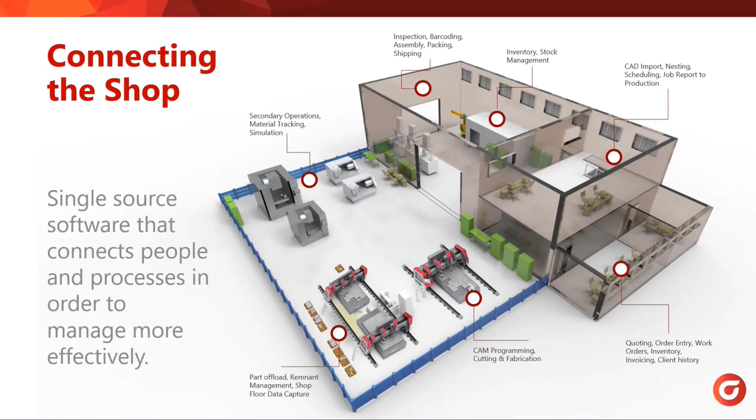Our targeted audience for today's webinar are customers that have SigmaNEST Tekno package. I'll be demonstrating 5 of the top reasons our customers choose to upgrade to the SigmaNEST PowerPack, which is the next package up. So what we want to be considering in the background is what's important to your operations. Remnant tracking, sheet analysis, business interface with host ERP, inventory control, and continuous nesting. Let's go ahead and start.

One area that I love about the inventory control is that you're able to import all your sheets that are available in your facility into SigmaNEST, and it can become part of the SigmaNEST ecosystem, where we can track the inventory as it's going through the life cycle of your process. So all our sheets and our inventory is found in the sheets list here, and then we're able to see all the different materials that we've loaded into the plant. I can look at prime sheets, coils, remnants, and future remnants.

What I like about it is how easy it is to load. So you can hit the new button here. You can receive some material into the plant. Maybe it's a 120 by 60. You receive 20 sheets. You can put what location you put it in, in your plant. Maybe the mill that you bought it from. Maybe you bought it from, let's say, Klockner. Lots of sheet data information, heat numbers, all that information can be tracked. The value of the material, if it's available for the general inventory, it's reserved for a certain project, or maybe it's on consignment. So just as easy as that, we're able to add 20 new sheets into the module.

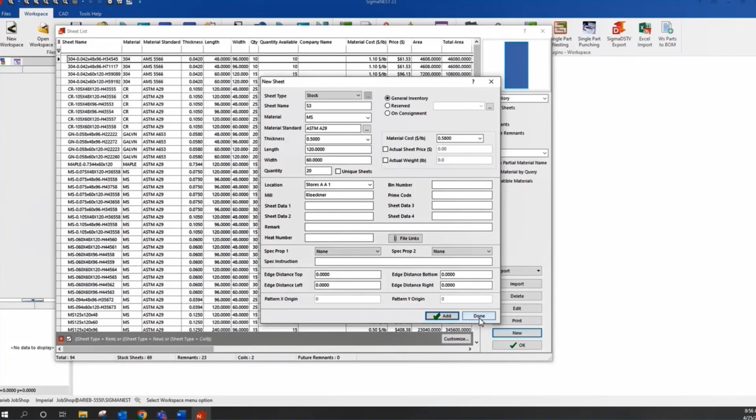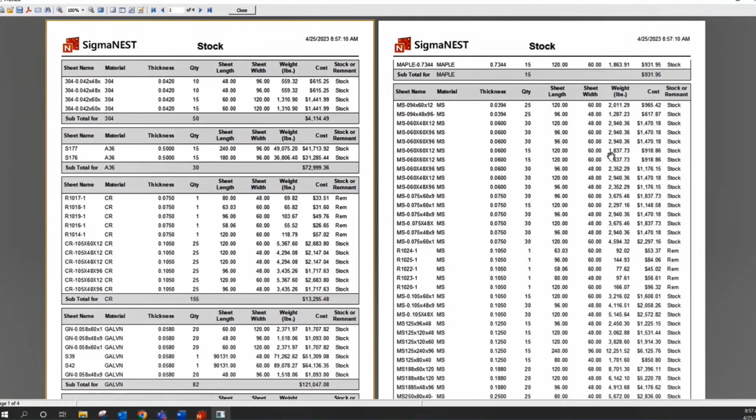Then we have also available for you some reports. So let's look at some of the reports here. I'm not going to look at all of them. We're going to look at the sheet summary and the grade by thickness and remnant. So let's preview that real quick. The first one here is our sheet summary. So this is all the different materials that exist out in the plant. If it's stock, if it's a remnant, all of that information is stored right here. Very easy, when you're setting up an inventory, you can start out with that and then confirm the locations and the quantities and all that.

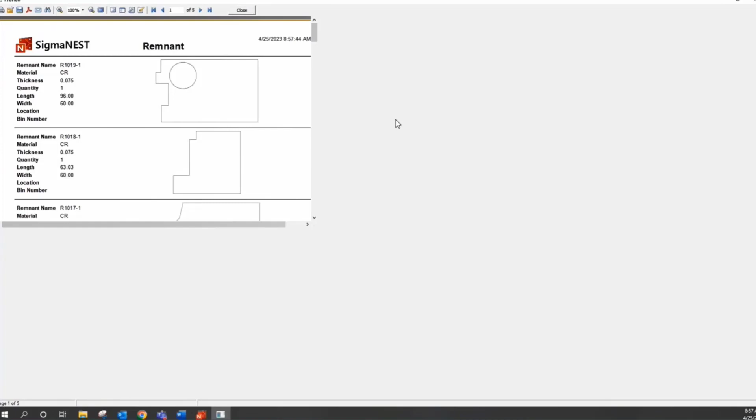Here's the material broken down by grade and thickness, another report that's available to you right out of the box. And then the last one that I like is the remnant. So here's all the different remnants that we've created as we're working through our processes that are available out in the plant to us right now. So those are some really neat prints that are available.

As you go through the process of loading new programs, grabbing material, updating your completed jobs out there on the plant floor, all that information is updated right here in your inventory control. So your quantities are going down, new sheets are being loaded into the system, and then also remnants are being tracked and made available to you with the update button. Some of the neat things about inventory control.

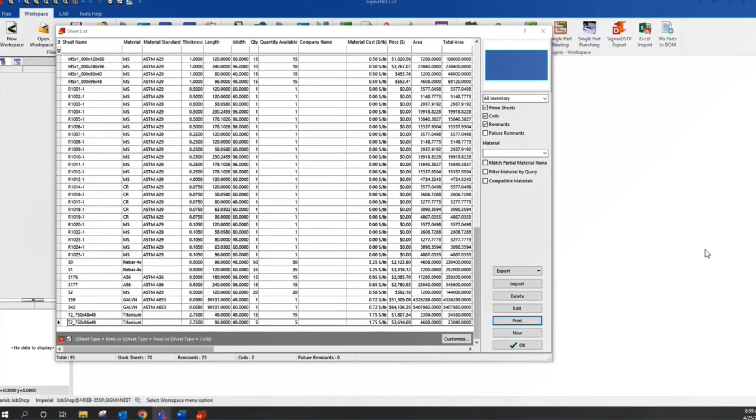I'd like to start out talking about remnant tracking by creating a remnant first from a raw stock sheet of material. So I'm going to open up a workspace here with some typical parts, hit the new task button, check out the parts, and go over here to my sheets list. Now we're actually accessing the inventory control module right here.

So we can look at all the different materials that are available in that thickness and that material grade. So you're not seeing all the materials. SigmaNEST is only showing you what materials are available in that category, okay? We want to look at raw material, so I'm not interested in seeing any remnants or coils right now. These are the prime sheets that are available.

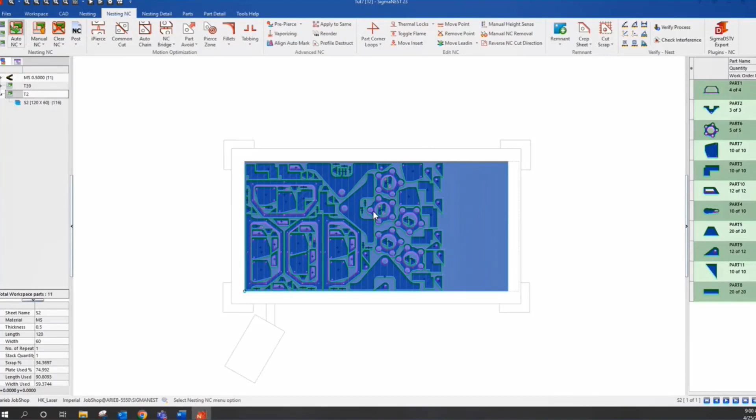I'm going to pick a 60 by 120 sheet to load this on. I'll hit OK here, and then auto nest. This will nest on that sheet. We'll create the toolpath real quick. We will create the remnant. Let's go ahead and add text.

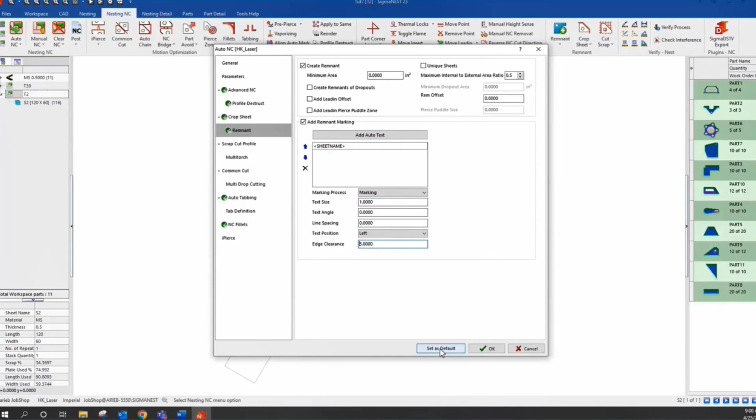We'll actually have the machine etch the name of that sheet on the remnant to help us better identify it out in the plant. So we'll add the sheet name. It'll be marking. We'll put it at 1 inch high, and we'll put it on the left with an edge clearance of 5 inches. Set as default, hit OK.

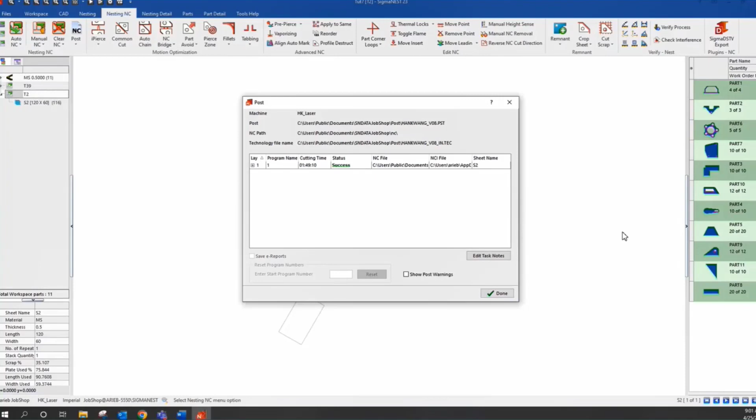All right, so there's our remnant that we've created. There's the etched name of it. We'll go ahead and post it. Now, this posting is what I like to call a trigger event. It produces the posted code, but it also takes that remnant and puts it in a WIP folder. We call it update in SigmaNEST, okay?

So when I get a signal back from the plant, and by the way, before we do that, let's print out a report that the plant would appreciate, and it'll be a good vehicle for them to communicate back to us that the job's been completed. So let's go to reports, and we want to create a future remnants report here. We'll hit preview.

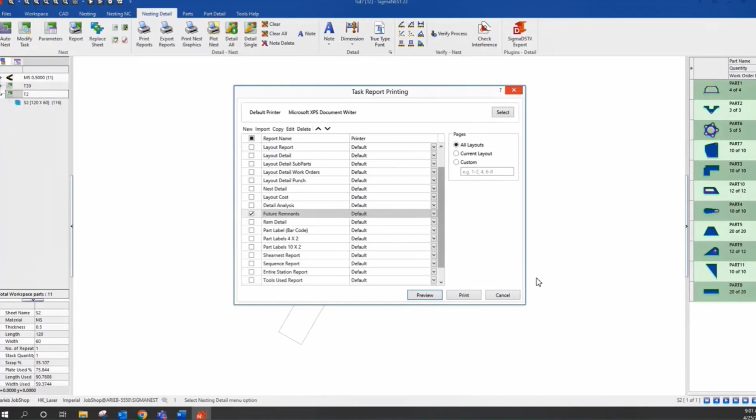This is one report that we'll send out there to tell that operator that we're creating a remnant and we want to know when it's been completed. So that's what the future remnants report looks like. It has the length, the width, and all of that information, and they'll be able to tell us when it's completed. So we'll hit cancel there, and let's go ahead and update that.

So we get the information back from the plant that they've run it and that remnant is now available. We want to present that to our inventory control module so that the team of programmers will have access to that remnant. That's found in the update button right here, program update. We can look at the machine that it was cut on. We can look at the remnant. I can double click on it right here.

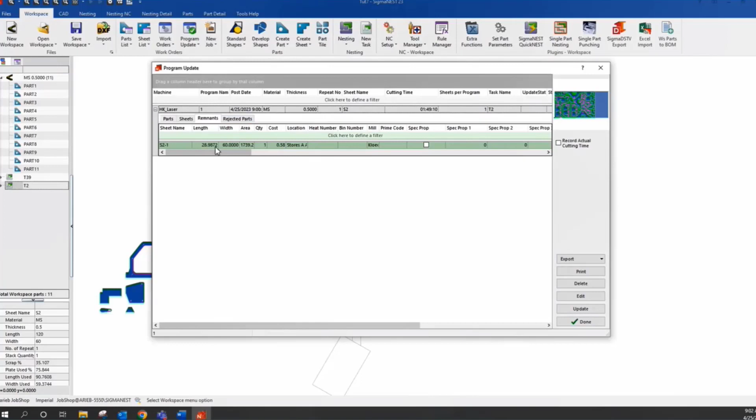I can see it. I might even put where the remnant was stored. Maybe that's what they've told us, so I can put the location and all that information in there if I wanted to. I can even do some neat things like rotate and all that other stuff. There's some really neat things that we're able to do. It's available for general inventory. We'll hit OK. We'll hit the update button.

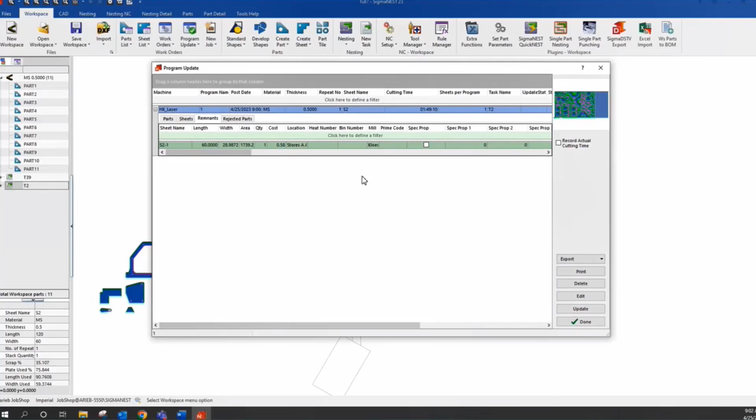Now that job has been completed. That piece of material is now consumed from our sheets library, and that remnant is now created. Okay, so now let's take it one step further with the remnants. We'll set up a new job, new task. We'll just grab a few parts here, and we'll go to our sheets list and look at just remnants that are available now.

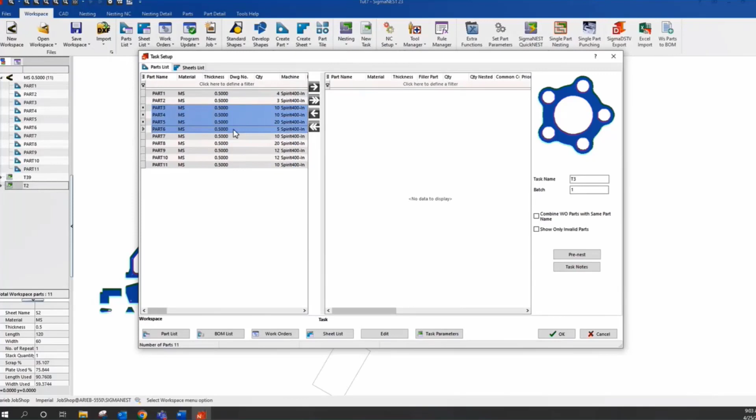So I want to just see the remnants. Here's the one that we just created, okay? We'll go ahead and nest it on that remnant. So I'll hit OK here, OK, and then auto nest.

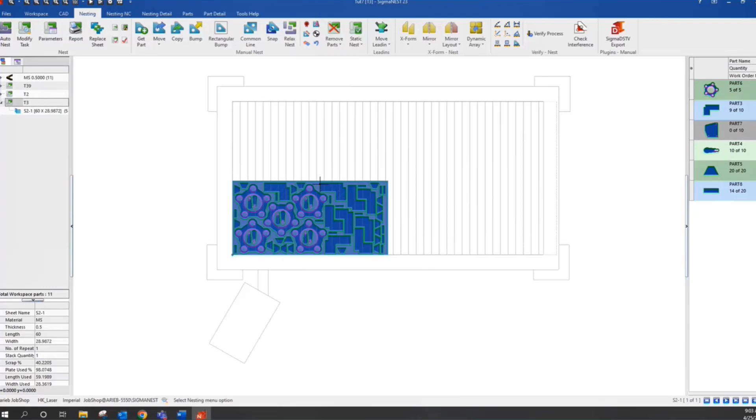So here we've just had a program, nested it on a 60 by 120, created a remnant, added some marking to it so we can identify it, updated it because we got a signal back from the plant that it was completed, and now we've nested a new job on it to consume that remnant. This will be part of the SigmaNEST process at this facility.

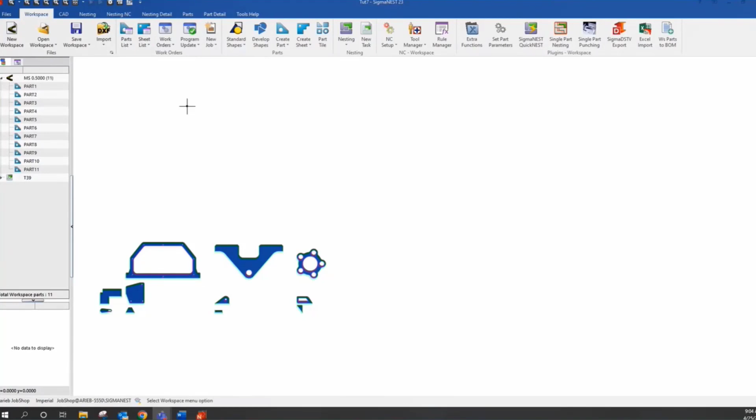This is a very useful tool for our customers for many different reasons. So let's go ahead and start by showing you how the best sheet analysis works. In this case here, we've got some parts here on our screen.

We're going to set up a new job, and we have access to us in this category of material, different sheet sizes. Okay, we have some 60 by 120s. We have this. This is a remnant here. So let's look at just the prime sheets. Okay, so 60 by 120, we have a really big piece here, 24 by 96, 80 by 40, 96 by 48.

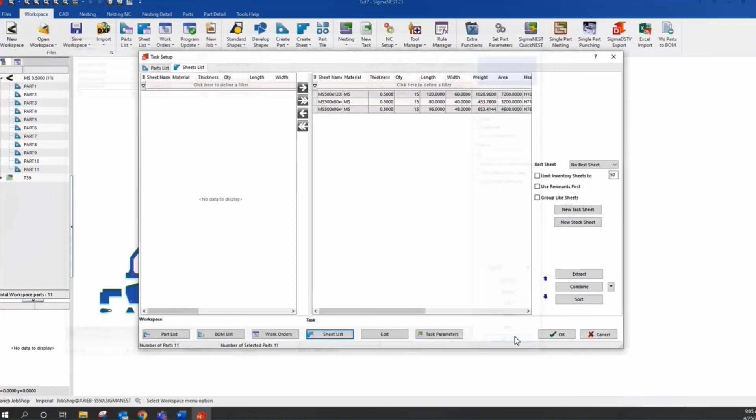And what we don't know right now as the programmer is which one of these sheet sizes, if we had it chosen, would give us the best scrap rate. So I'm going to have SigmaNEST figure that out for me. So let's go ahead and load a 60 by 120, a 80 by 40, and a 96 by 48. And we'll let SigmaNEST figure out which one will give us the best scrap rate.

Okay, now notice here, this is important. Notice that they have quantities, 15, 15, and 15. With the best sheet analysis tool, you can actually say no best sheet right here. What that means is we would nest on this first sheet size, the 60 by 120, and exhaust all of those sheets before then going down to the second sheet available to us, and so on to the third sheet.

This would be great if we had a stack of remnants out there in the plant that they have staged with the cranes, and we wanted to pull the first one off and have the program or the operator consume that piece, then go to the second one that was right under it, and we can actually set that up here to nest in that way. Okay, so to make it easier for the operators out there on the floor. That's no best sheet.

Best sheet mixed is another option. There's only 3. The best sheet mixed would say, if I needed one 80 by 40 and one 48 by 96, I can choose that. SigmaNEST can choose that. Okay, so we're going to consider all 3 different sheet sizes and come up with the best scrap rate using all of the material available to us.

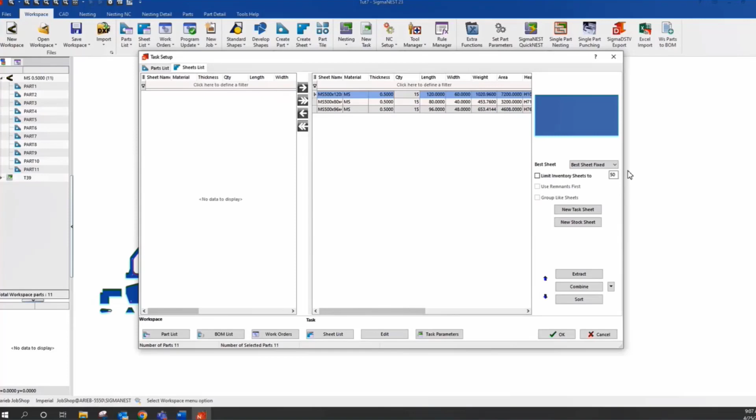Now, best sheet fixed would say to SigmaNEST, I want you to pick one of these 3 sheet sizes and only use that sheet size for this job. Okay, figure that out and let me know the answer. Okay, so let's go with best sheet fixed for this demonstration. We'll hit OK and auto nest.

And SigmaNEST will look at those 3 sheet sizes and look at the job that's been assigned to it, all the parts that are needed, and it'll tell us what we need to do. So if you look down here in the bottom left-hand corner, SigmaNEST picked out the 60 by 120. Okay, that would give us the best sheet.

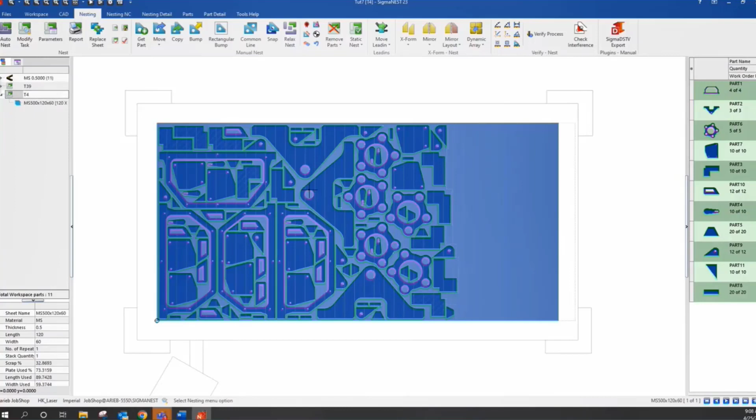Okay, this also is very handy if you're getting ready to order material from your local material vendor, and you have a big project coming up and you want to know exactly the right sheet size to order. Maybe the vendor is giving you a freedom of lengths. Maybe 60 inches is the width on this coil, but they can cut it at 1-inch increments however you want it. You could use the best sheet analysis to help you select the right sheet size that's going to give you the best scrap rate. Best sheet analysis.

Continuous nesting is very helpful if you're combining work orders. Let's say that you have a facility. Your facility has multiple jobs that are being loaded into SigmaNEST, multiple customers say. What you can do is you can go here to this work order queue right here within SigmaNEST, and we can see real quickly by just hitting this due date here that we have a lot of jobs here that we need to process.

Okay, so each one of these jobs, if I were to double click on here, we can see all the different parts that exist in these different work orders. Okay, we're also able to see the customer name, the work order number, the due date, all of that information that we need, even materials and thicknesses, and you can have different materials, different thicknesses, all of that contained in one job.

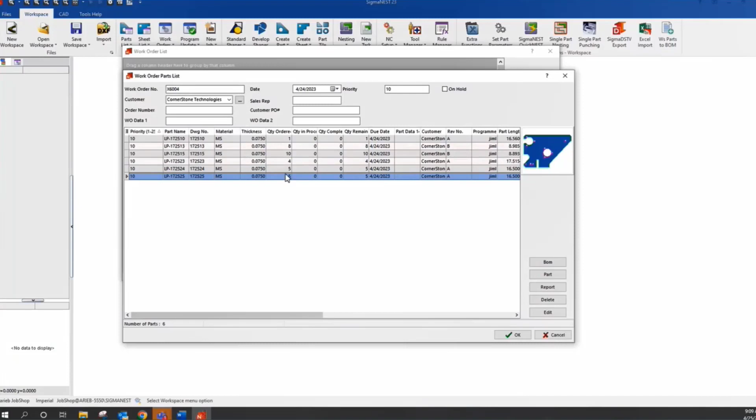So in this case here, this steel service center has multiple jobs that they want to run, and what they want to do is combine those and have SigmaNEST nest those down in a continuous nest fashion. Okay, I'm going to show you how that works. All we have to do is simply load however many jobs that we want SigmaNEST to consider. Okay, in this case here, I'm picking maybe 6 or 7 different jobs. Okay, so let's go ahead and load those into the SigmaNEST workspace.

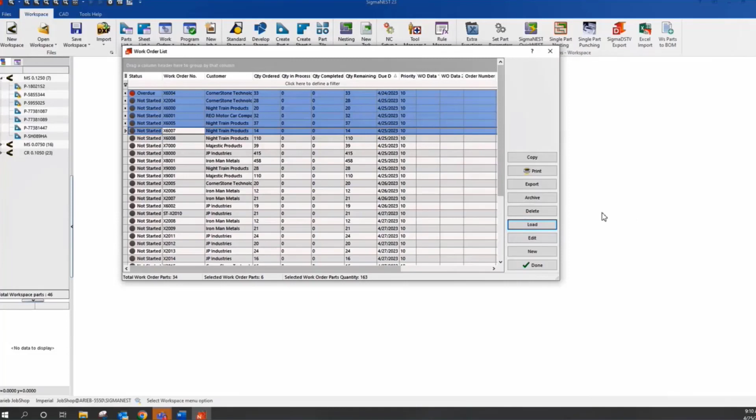Now, the first way that I'm going to nest, I'm going to nest it in a way that we're going to mix all the work orders together. Maybe we're nesting on a very high, expensive material, and we want to get the very best nest. The first thing I like to do is hit this part tile.

And when I have multiple work orders here on the screen, I love to hit this little, it looks like a little gear, kind of like. That opens up this window here. And then I can say SigmaNEST color by work orders. Now I'm able to see all the different jobs, all the different work orders, noted by different colors, okay? Just helps me a little bit.

If I want to know a little bit more about each one of the parts, I simply just hover over here, left click, and then I can see here in the bottom left-hand corner what the part name is, the work order, the due date, material thickness, and different things like that. Okay, so I can fly around and see a little bit. So it's very intuitive. It's a very great tool for me as the programmer.

Okay, so another tool that I'm going to call up next is called Auto Task. When I look at this screen here and I've pulled in those 6 work orders, I don't know how many different materials I might have just pulled in. So an easy way for me to figure that out is to go over here to this Auto Task. Now, this tool right here is available in Techno, but it's also heavily used in PowerPack for this reason that I'm about to show you.

So I can say Auto Task by group. SigmaNEST there in just a couple clicks has told me that I have cold rolled material in this thickness and 2 mild steel materials in different thicknesses.

Okay, I can also, with this Auto Task tool, hit this Run button. And when I hit this Run button, this is a predetermined, a little bit of a semi-automation tool that can automatically look at my inventory that's available in that material, nest it down in a way that I want it nested, okay? And then hit the toolpath. I can actually post it if I wanted to.

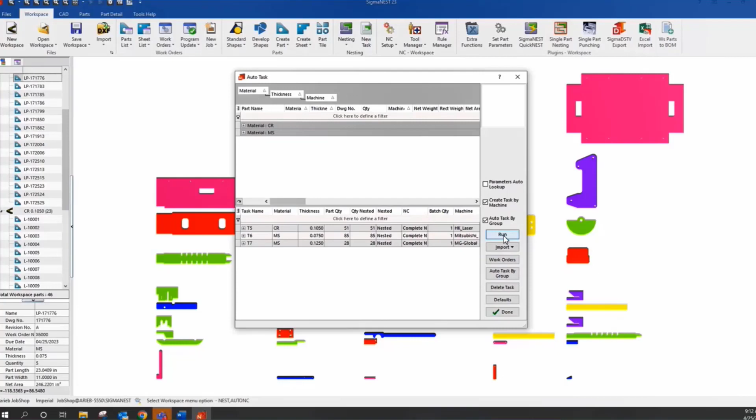Now, in this case here, I'm not going to actually post it. As you know, posting it makes the G code available for that particular machine. I want to stop it after the nest and the toolpath. I'm not going to post it just yet. And I'll show you why. I want to see what SigmaNEST has done. Okay, so here's my first task.

I can come up here and hit this multiple window screen here. That multiple screen window is awesome. You can take parts, you can move it around, you can go from one sheet to the next and all that. And we actually have enough that we can fill 12 screens, 12 different panes, as a lot of our customers use.

So here, this particular nesting algorithm that we use for continuous nesting, we're saying mix the work orders together. That'll give us the best nest, but it might not be the best way that we like to process it out there at the machine. It might confuse the operator.

I know that we have a tool called Color Offload that will help the operator see where the different work orders are at with the color. A lot of our customers use color coding printers that denote the different colors, that help the operator get the parts to the right areas, the right pallets.

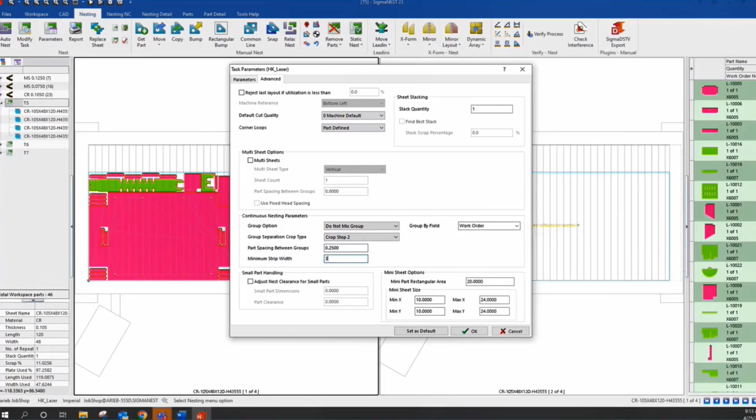Okay, let's just pretend that this one here, we didn't want to mix the work orders. So I'm going to fly right over here to the parameter screen, and I'm going to go to my continuous nesting parameters dialog box here, and I'm going to say do not mix. Okay, now this is going from one extreme to the next. Okay, let's go ahead and hit that and just see what it does. Okay, we'll hit auto nest, renest.

This is telling SigmaNEST that under no condition can you mix these pieces together, these work orders together. So notice we have a big void right here because we have this big part here, and we can't start nesting this work order here, the green ones, until we've completely nested the red ones.

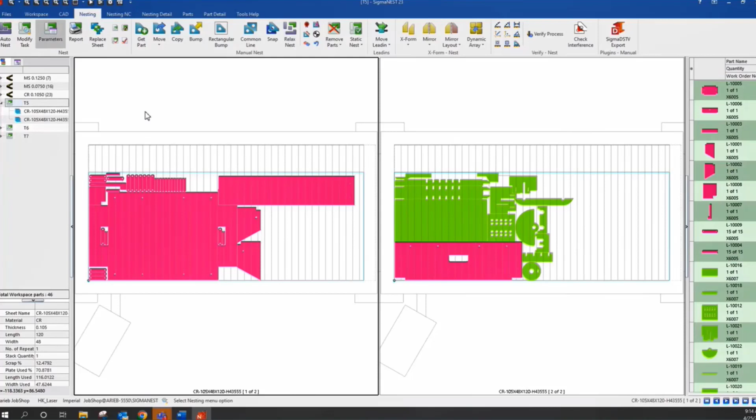Okay, now there is a happy medium that I like to bring out, and it's right over here. We can go right back here to our advanced, and we can hit group. Okay, set as default. Okay, nest, renest. This is going to give us a slightly different result. I like this because it's not crazy nesting them together, but it is taking advantage of areas that we want SigmaNEST to do. Okay, it's grouping the work orders together.

So this is continuous nesting. So many benefits start coming from this. The more parts that SigmaNEST has to nest, by combining these multiple work orders, bringing all these work orders in, that gives us a better nesting result. It's less changeover at the machine. We're not having to set up for a particular customer, cut all that stuff, take the remnant, put it in the stock, bring it back out, maybe set up for the next customer, cut their parts out. So this is a very efficient use of the machine as well.

And then also all the forklift action, all the material, the manpower required to support multiple changeovers and customers and all that stuff is very time consuming. It leads to increased machine downtime, your capacity starts to drop and stuff. So this continuous nesting module that you can put on top of the PowerPack solution is very helpful for our customers.

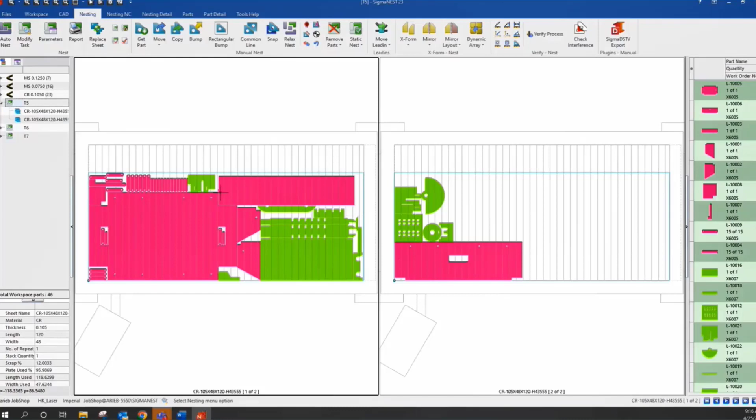When you get PowerPack, you actually have the foundation needed to build on a fully smart connected shop. The first thing that people like to do is to connect their ERP systems, your business system. We would like to be able to see new materials that are being loaded into your ERP system. Your new sheets that you're loading into the plant can come over automatically. We have a product called SimTrans that we would bolt on top of your PowerPack. Okay, so that's one of the first things that they like to do.

Our customers also like to import and share that data of new jobs being loaded into the ERP. We call them work orders in SigmaNEST. So if we look here at SigmaNEST, we can see that with SimTrans and with PowerPack, we're able to connect the ERP. So when you're loading new jobs into, this is just an example of a steel service center that's getting jobs coming in from sales or whatever, they're being loaded into the database as orders into your ERP system, your business system.

And that information is going over into what I like to call a watch folder, usually by a CSV file or something like that. But we're actually seeing that with SimTrans and communicating that information over to SigmaNEST. That sets us up for all kinds of great benefits, like combining work orders. It's so much faster, so much more efficient, to be able to get that information, work orders, new material. It reduces the duplication of efforts. You're not having to pay somebody to load that information into the database and then send files or worksheets over to your programmers and have them then manually load that information into the system.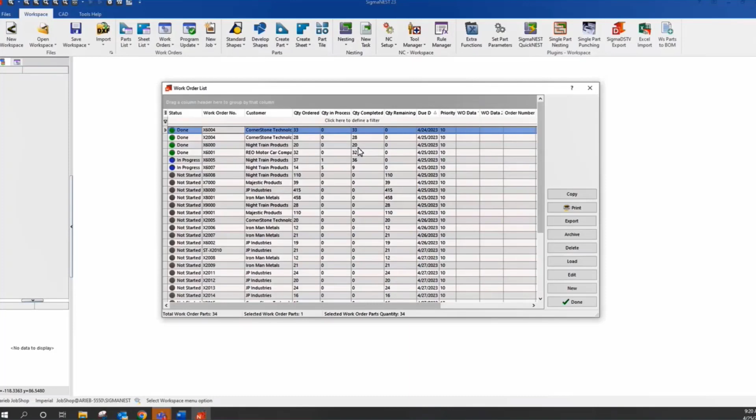So these are great benefits to connecting your ERP, but then also with SimTrans, you're able to connect SigmaNEST to the shop floor with products like Load Manager. If you have multiple machines and you're wanting to do load balancing, you're able to do that very easily, and PowerPack gives you that foundation. Also, the color offload system, when those jobs are assigned to a certain machine out there on your floor, we're able to do that through SimTrans and through the PowerPack system. So really, PowerPack becomes the foundation needed to build that connected shop. So if you're interested in that, if you're interested in MRP and a lot of the quoting tools, all of that needs PowerPack as your foundation solution.

All right, just wanted to recap the different factors that we were talking about. This webinar really is designed to generate conversations with our customers on how SigmaNEST can be a vital partner in the production improvement process.